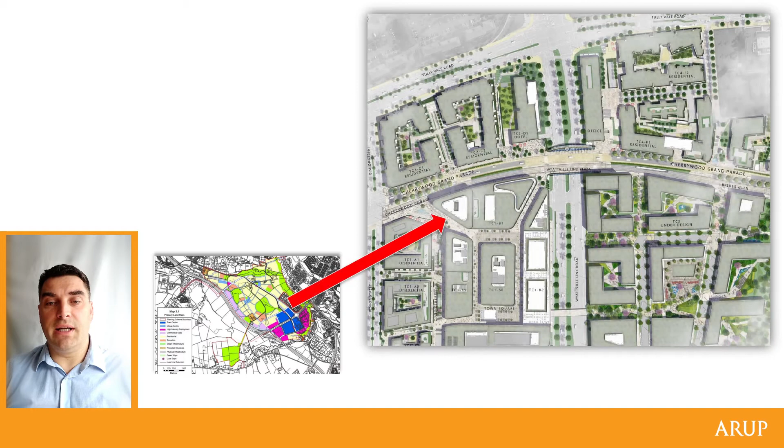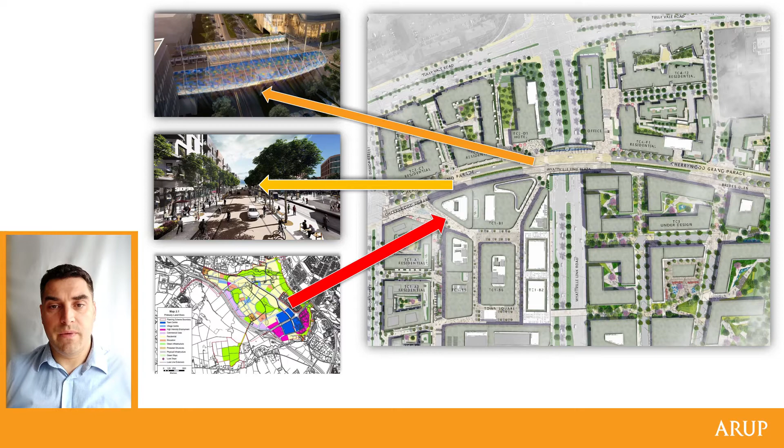Cherrywood is located in the south part of Dublin in Ireland. The new town centre development includes a combination of residential, retail, parks and office space. This developing suburb is an important residential and employment settlement to the south of Ireland's capital city. Cherrywood Grand Parade Bridge will form an integral part of the town centre. It will tie into the existing light rail viaduct and will accommodate 2 cycleways, a footpath and Grand Parade Road, which runs adjacent to existing light rail track.

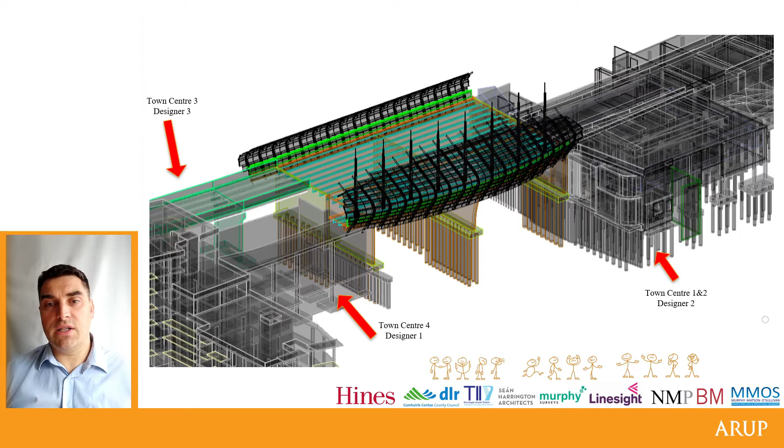It is primarily important for the bridge to provide a connection within the town centre on either side of Wyattville Link Road and provide shelter from wind and rain for all pedestrians. Considering the complexity of the project and to optimize constructability and coordination with architects, our client Hines and other external project stakeholders, we made the conscious decision to fully model the bridge in 3D.

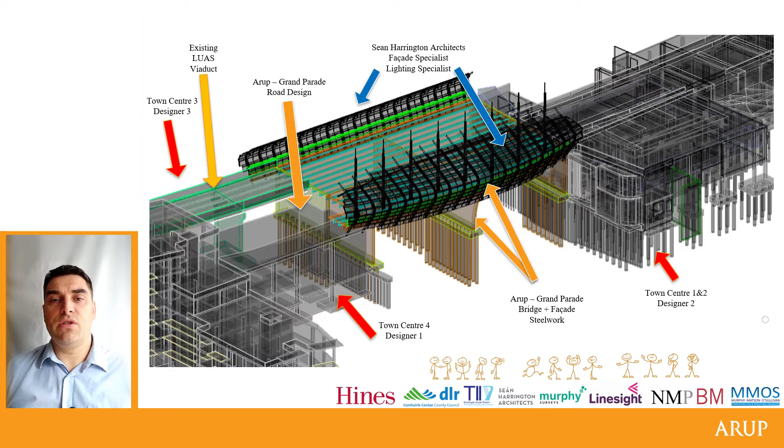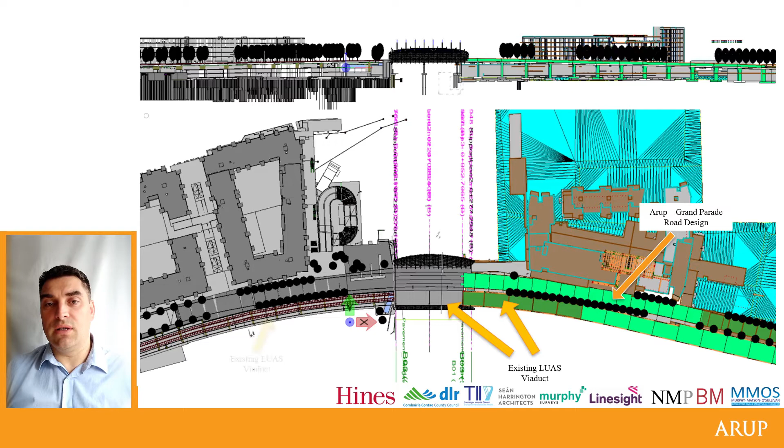The scope of the new bridge works included a new bridge in form of widening of the existing rail viaduct and the provision of a new pier and abutments. The structure consists of 2 spans each of 22.5 meter length. The new bridge varies in plan with over 60 meters at the pier location. The superstructure consists of composite steel girders with an in-situ concrete deck and curved concrete parapets.

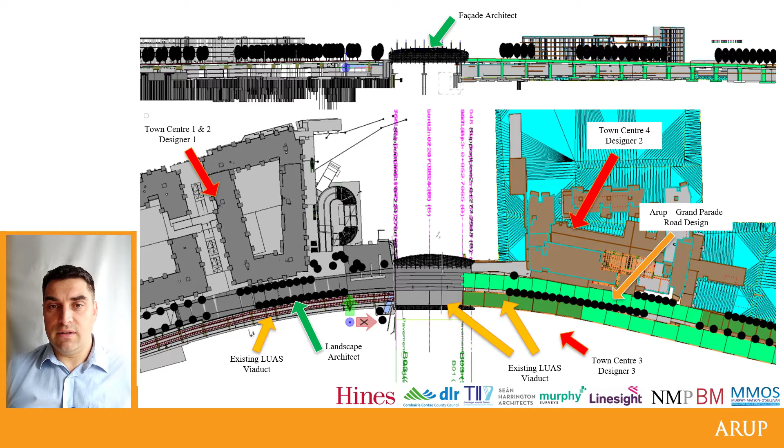Second, the architectural facade along the eastern side of the newly widened section with a superstructure of approximately 9 meter height and structurally connected to a torsion steel box that is composite with the deck along the curved edge of the bridge. Third, the architectural facade along the western side of approximately 5 meter height and structurally connected to a new torsion steel box which ties into the existing bridge and the abutments of the light rail viaduct. Fourth, piled foundations to all supports of the new bridge.

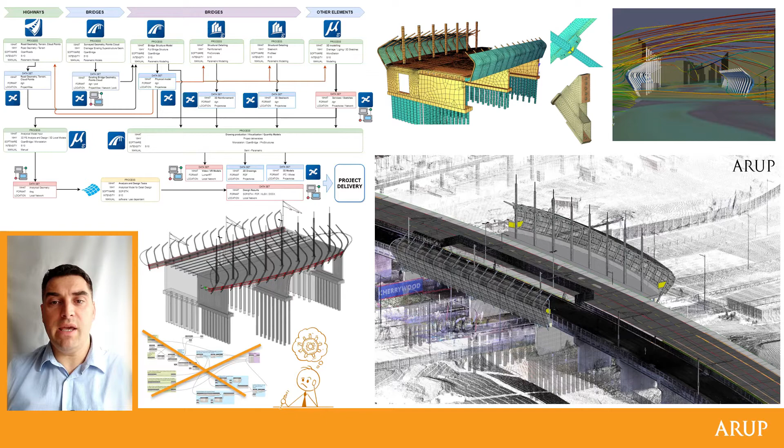Prior to the design commencement, we had to make a decision regarding the modeling workflow. It was obvious that for available resources and skills, the Bentley platform provided the most efficient solution. With a parametric link between ProStructures, OpenBridge and OpenRoads, it was possible to progress modeling and detailing prior to the final geometry being confirmed by the architect and the road designer. The geometry modeling did not require scripting or post-processing, facilitating the project being delivered by a much smaller team than would usually be required to design a bridge of this complexity.

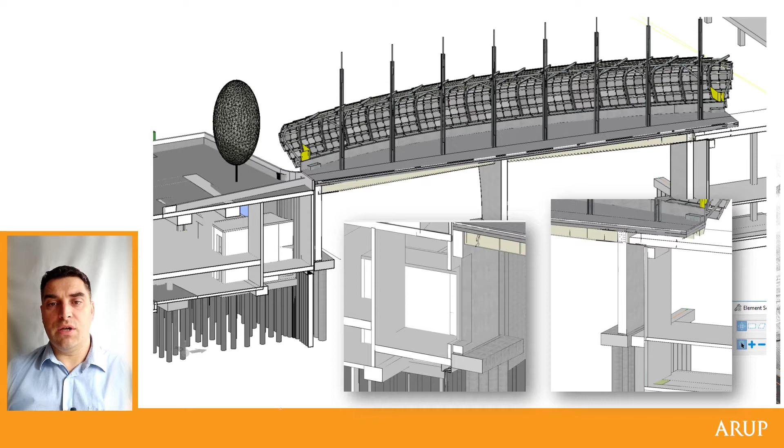The model information was easy to use as reference geometry in the global and the local and the CFD analysis. Bentley software was chosen due to our desire to perform accurate 3D bridge modeling and detailing for the entire project, which was a unique decision in Ireland. The intelligent and interactive use of digital workflow involving OpenRoads, OpenBridge and ProStructures reduced risk and mitigated design errors. The data collaboration, communication and management processes using Bentley tools allowed the project to be delivered within budget and timeline.

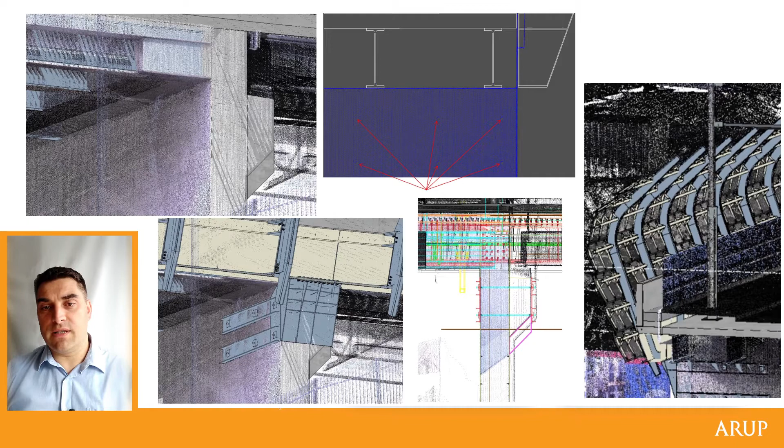Carrying out the point cloud survey assured confidence in the model and mitigated potential changes that could occur during the construction process, thus saving materials and reducing the carbon footprint. Point cloud features included in Bentley software allowed the modeling of the new deck geometry tied to the existing structure. With great accuracy, we were able to develop the steelwork geometry of the west facade box and brackets to tie with existing supports.

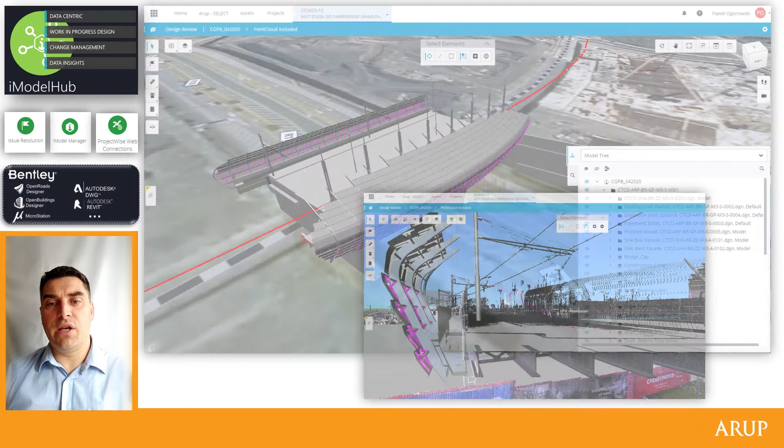With 3D models being data-rich, opportunities to use the models to provide additional information beyond the scope of this project were considered from the outset, as a way to provide added value to the client and contractor. Arup recognizes the potential benefits that can be derived from these models. This is a proactive and new initiative in our industry in Ireland.

The new models that Arup delivered are ready for inclusion in the asset management process, forming the ultimate connected data environment. The bridge models were shared with the external quantity surveyor. Considering industry foundation classes for infrastructure have not yet been officially published, we use the iModel format to store information

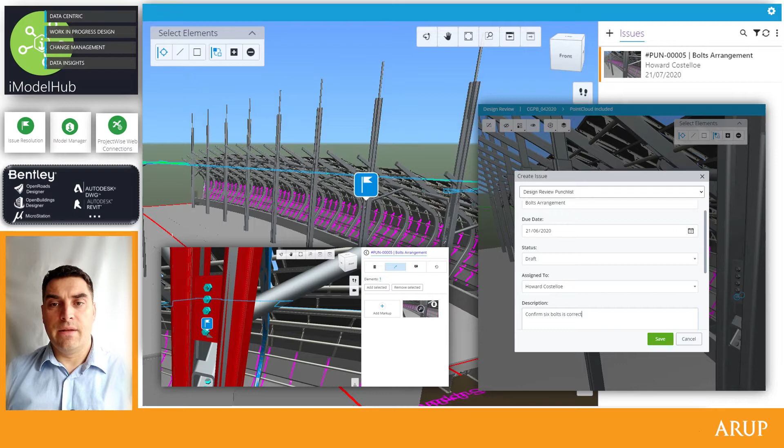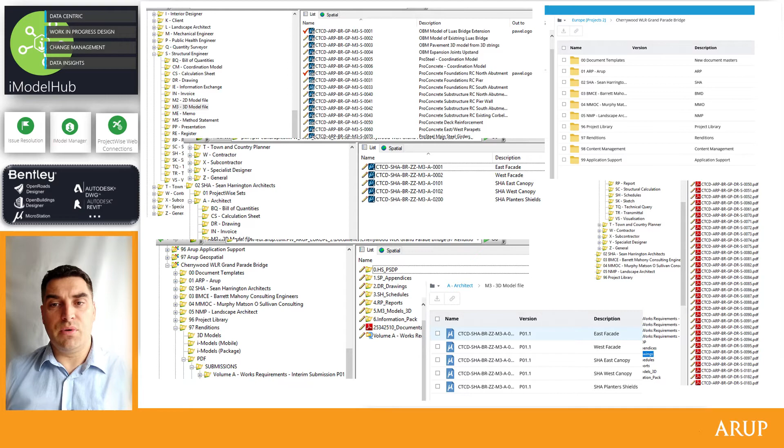about the bridge geometry. The iModel hub was used to store models and enabled coordination between Arup, the architects, and external consultants. The iTwin design review allowed the team to track comments and responses raised during technical reviews. Project work streamlined by implementing a workflow built around ProjectWise. This solution improved the consistency, quality, and efficiency of the project team.

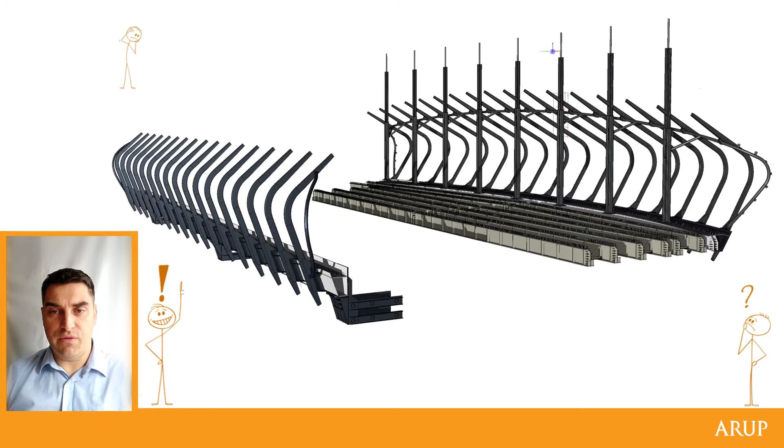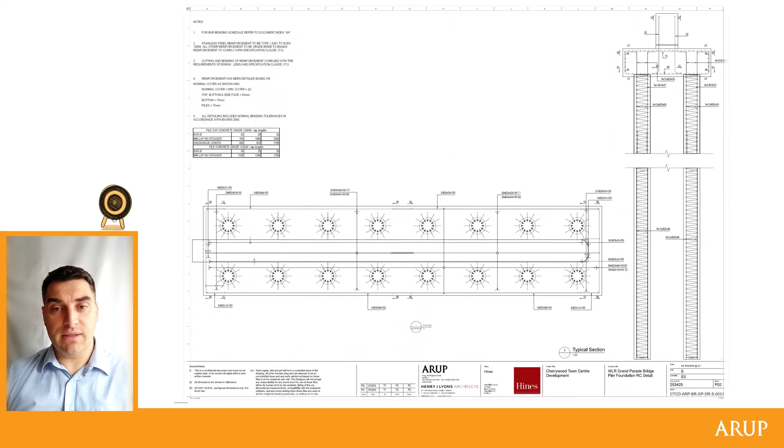The extraordinary support and cooperation with Bentley support team improved our efficiency of delivering the complex 3D geometries of the reinforcement and steelwork, and production of 2D drawings, while at the same time allowing us to contribute to enhance the software features. Delivery of traditional 2D drawings and schedules was the main element of our scope. Thus, it was crucial to develop a workflow that would provide an honest presentation of our 3D models.

Modeling in 3D provided added benefits of sharing accurate scheduling information pulled directly from our models for the quantity surveyor. OpenBridge reduced the time required for modeling by at least 50% compared to alternative solutions. We were able to fast-track parametric bridge geometry modeling and offset the additional time to expand our skill set in ProStructures, as we had never used this software before.

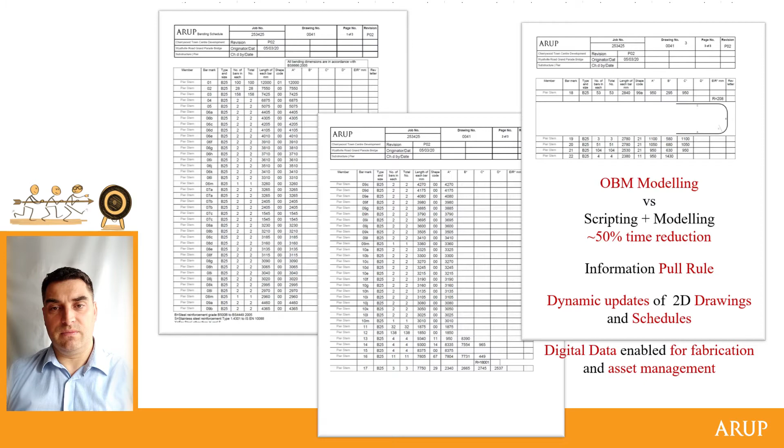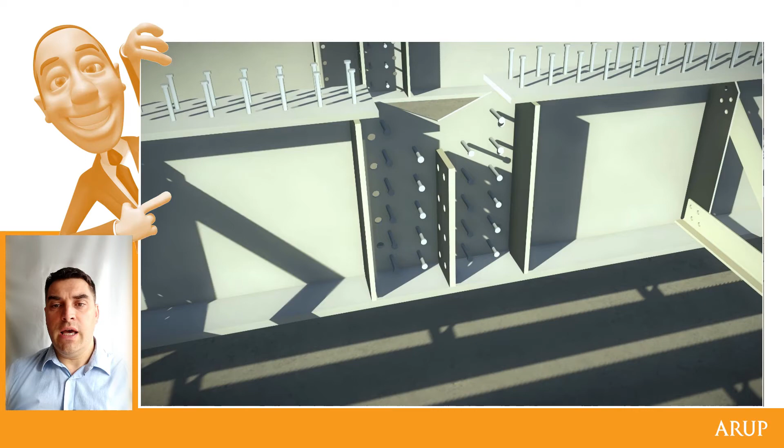Setting up the production of drawings using sheet indexing automated and improved the plotting process for the different suitability stages and submission revisions. Bentley LumenRT had a vital role of providing added value to the project. We produced high-resolution images and videos, including 3D YouTube, and virtual reality models to receive feedback throughout the design process. Visualizing the design intent provided high value to the client and design team.

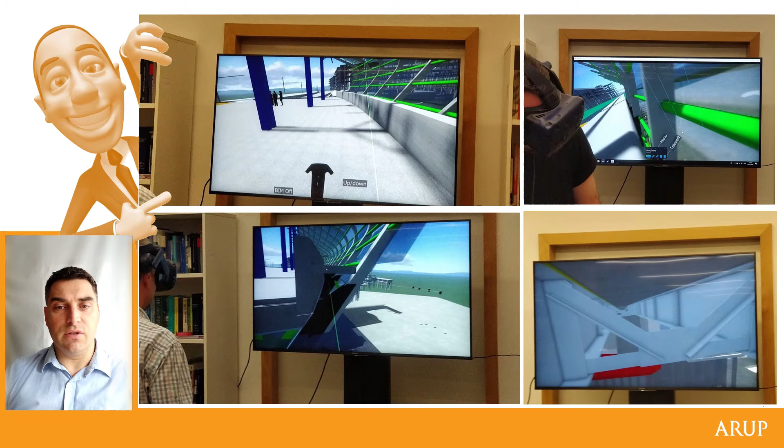Virtual reality sessions showing the rendered bridge model with the inclusion of coordinated design elements from other external consultants provided meaningful insights into the proposed design, beyond the scope of this project, at very little effort. The Bentley system workflow streamlined the design process for Cherrywood Grand Parade Bridge, enhancing communication and productivity for the team.

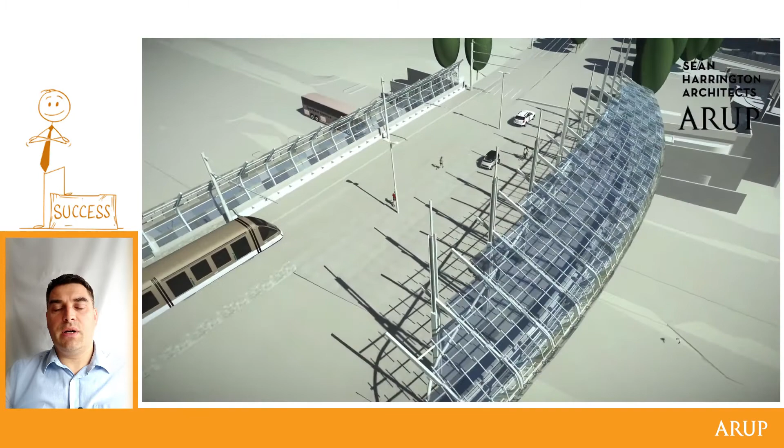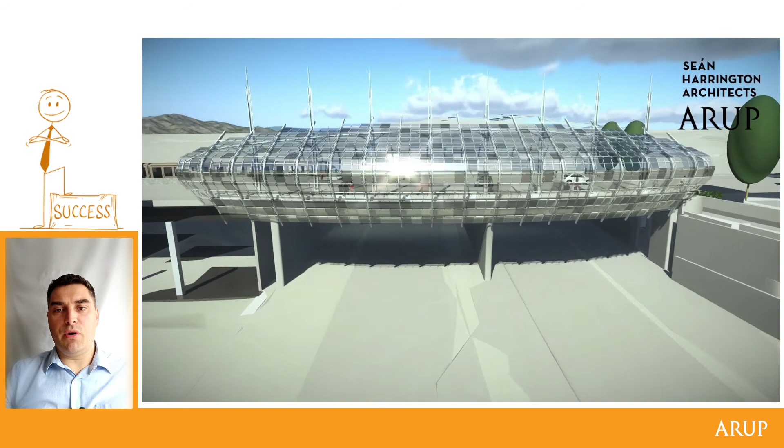The intelligent parametric modeling and seamless link between OpenBridge, OpenRoads, and ProStructures enabled this project to be delivered according to a tight program. With ProjectWise in place and using iTwin Design Review, the project was shared and collaborated on by stakeholders in a controlled manner.

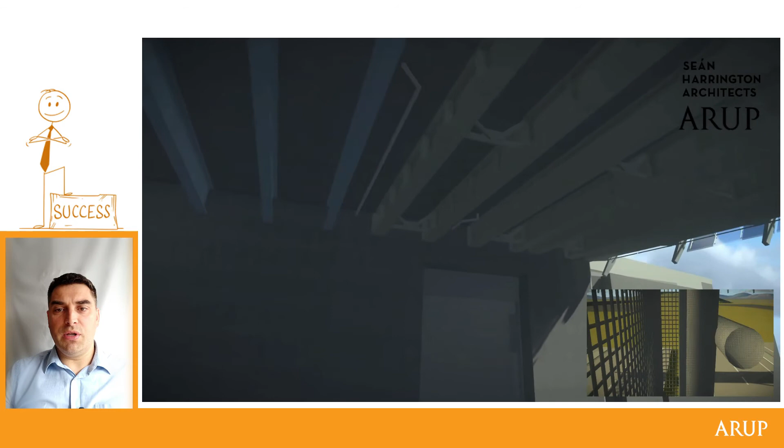Delivering the project with a comprehensive 3D modeling approach required a learning curve and numerous challenges linked with the implementation of the new technology. The data collaboration, communication, and management processes between Bentley tools allowed the project to be delivered within the agreed budget and timeline. The level of detail achieved in the 3D models and drawings will be highly beneficial as the project progresses into

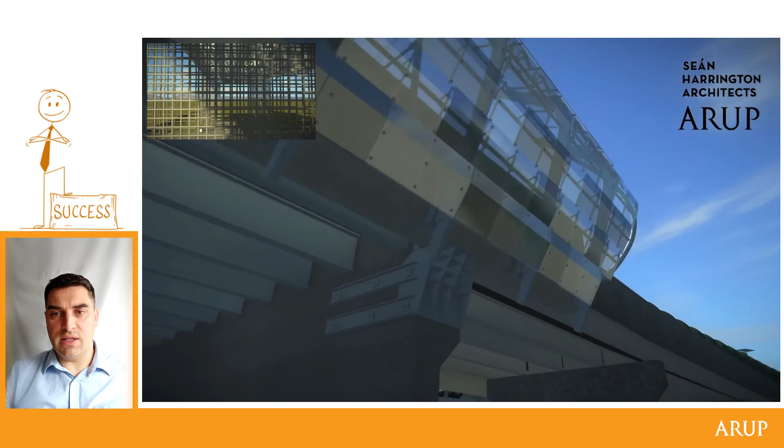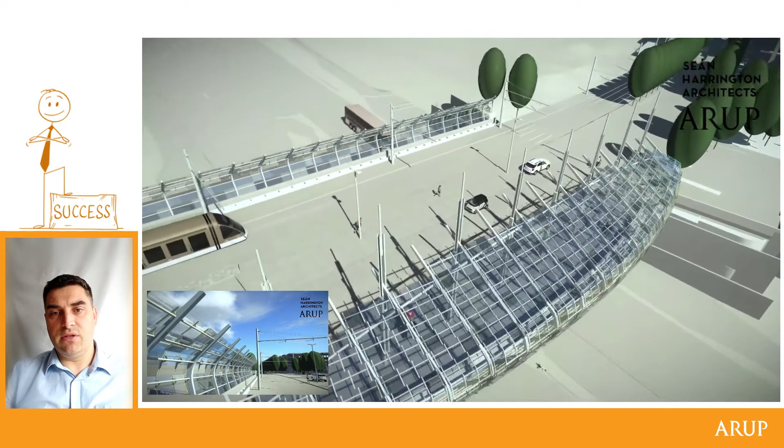the construction stage. We are proud that at the end of the project, we succeeded in modeling all parts of the bridge in 3D. We proved that people with ambition and passion can overcome challenges and make the impossible possible, delivering an honest, cutting-edge design.